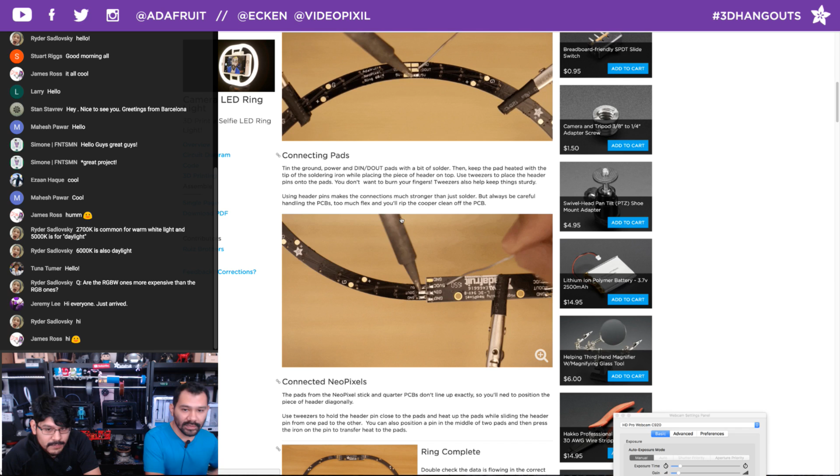So there's a big warning sign with this: when you're using this, do not apply too much pressure or bend them a lot, because you can literally rip off the copper pads. You don't want to do that, so watch out for it. It's going to add strength, but still be careful with them - they're a little fragile, not that fragile, but you know.

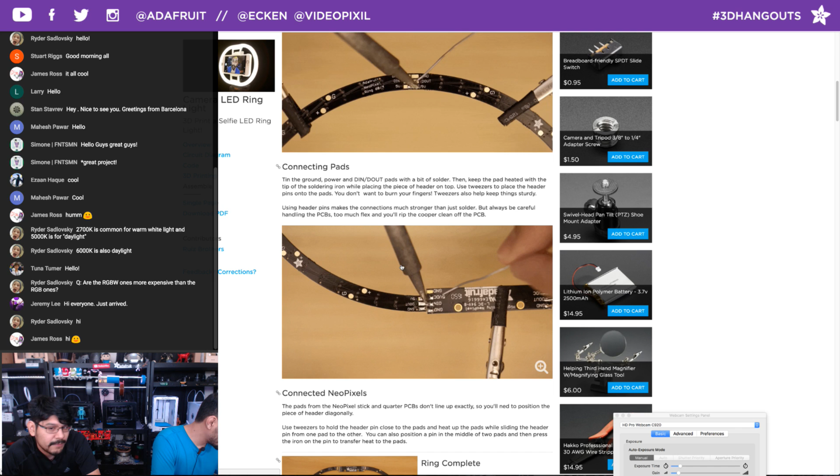Another tip I have is that the best way to solder these together and keep them very steady is to have 2 third helping hands, because 4 hands are always better than 3. What we did here was use 1 hand to hold the quarter assembly, and the other hand to hold the next PCB. That's really helpful a lot - if you don't have 2 helping hands, it's always good to have another one.

Because then you can have one held up while you're tinning wires on another one. You don't want to use just one because they're going to flop over due to the size of them, so it's always handy to have 2. And the flexible arm ones, even though they're cool and have a lot of arms, you really need something that's easy to stabilize in terms of alignment. Alignment is going to be a big thing with this - if they're not equally at the same height, they won't fit into your enclosure as well. And when you're soldering the headers together, there's going to be a big gap between the solder pads.

So you definitely want to make sure that they are completely aligned, nicely leveled, and straight to connect these together. Good point.

So the other tip when you are connecting these together is to tin both sides, both pads. Use a tweezer to hold the header on top, and then heat it up right from the middle so both pads are heated up at the same time. Then let go of the tweezer and the header, and just let it cool on its own. Don't blow on it, and it'll give you a nice strong connection.

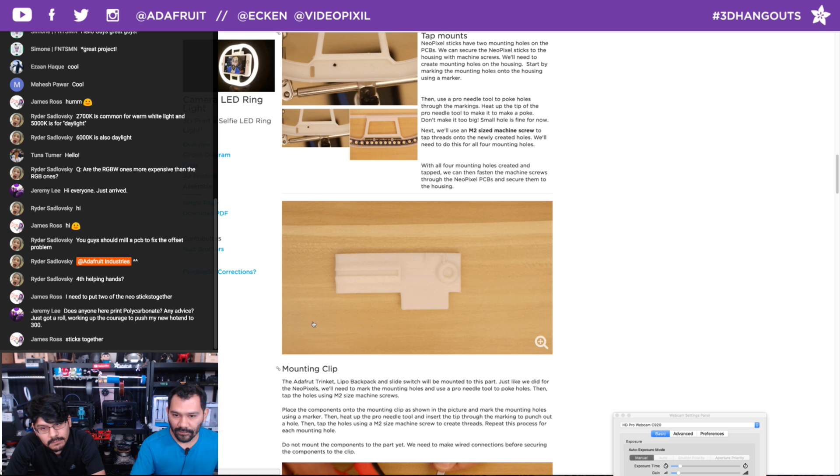Instead of having multiple mounting holes added for all the different boards, you can just go in there and poke out any of the mounts you need. Since you don't really need all 4 screws to hold the trinket, you can just poke 2 holes diagonally to hold it in place.

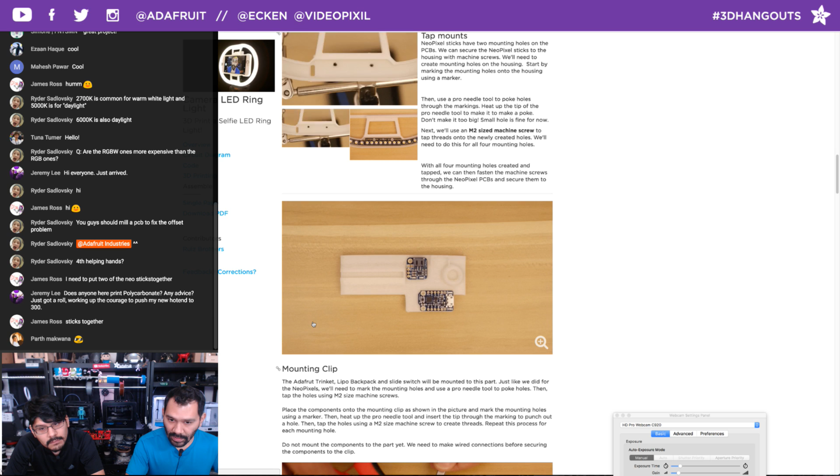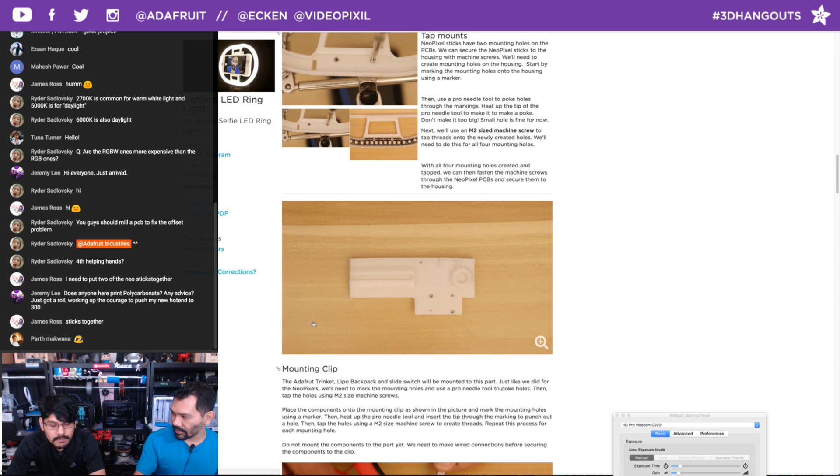So the Pro Needle tool actually came with our Lulzbot Taz, but you can pick this up at any arts and crafts store. It's primarily used as a sculpting tool to add details, and of course, poke holes through any sculptures. It's also definitely handy for unclogging extruders and nozzles. So it's a nice little tool to have in your belt.

And this was also the same method you used for mounting, or rather securing, the NeoPixel stick PCBs to the housing, since they have 2 mounting holes. Yeah, something we didn't have before with the 60 NeoPixel ring, there were no mounting holes on that, but the sticks do have 2. So it's pretty secure, it won't pop out because it's held in place nicely. That's a nice little tip there.

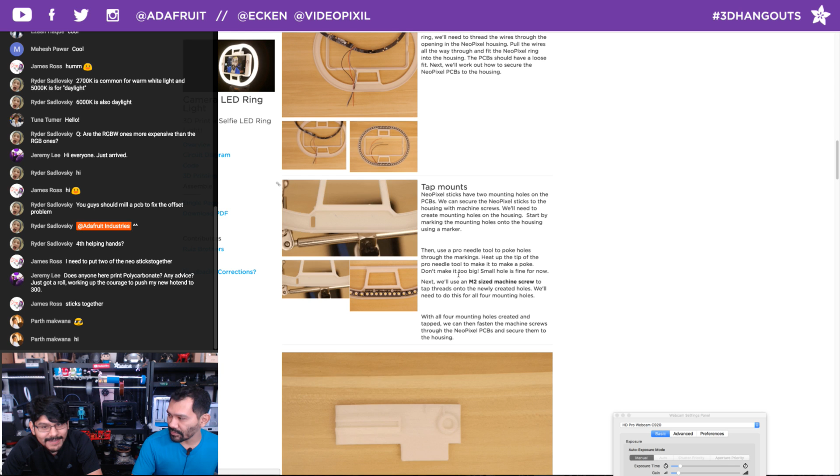One thing I forgot to mention, why I really like the Pro Needle tool, is that it's the exact diameter needed for an M2 screw. Yeah, because it'd be a little difficult if you made the hole too big. You could always make the hole bigger, but you can't make it smaller. Yeah, just print it out again.

All right, cool. So Flex PCBs are a great thing to have. If you don't have a Flex PCB yet, definitely use them. We're using them primarily to add more power and ground pins to a microcontroller. The trinket only has 1 or 2, 1 ground, and you need several grounds here, so using a piece of Flex PCB is really handy.

Yeah, the thing I had to do before we figured out how to do this is I was painstakingly making these Y cables, where I would create 1 cable and then have 2 that would connect to it to split out any of those connections. That was a big pain in the butt, because you needed all these extra helping hands to hold everything together.

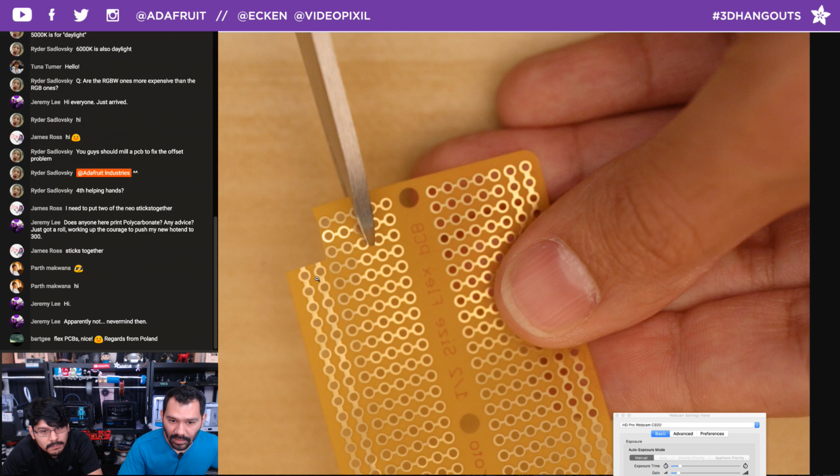This is simply about cutting off how many power rails or connections you need. One thing to point out, which I didn't notice until you mentioned it later, was the rails on the side have actually a bigger trace on them for power and ground. So I'd probably recommend using those instead of the little ones that I cut off there. Yeah, you can see that, they're a lot thicker. So use those. A little piece will go a long way.

And you can use scissors to cut them. I've used Perma Protos before, which are FR4 boards, I believe. Yeah, FR4, and they're a pain to cut. You really don't want to breathe the dust in, you need a Dremel tool. This is really easy to do, and it's thin and a little fragile. You can apply solder, tin them to make the strength a bit bigger. So be careful with them. It does flex, but you shouldn't be flexing them all the time.

And a tip for actually holding these while you solder: have a sacrificial little pin there to throw away after you solder it. So I would make, see how you need 3 connections here? I would have 4, and one of them would be a sacrificial pin, because this little helping hand would kind of bite it and mess it up a little bit.

So the tip here is to use a tweezer to hold on to the cut piece, and then attach it to a third helping hand. Not pictured here, the other helping hand is actually holding the end of that tweezer to stabilize it, because otherwise it's going to flip over with only one hand holding the tweezer. The tweezers have a really fine tip, so you can solder all the pins without covering a pin. That's really it. You can even solder on top of that, and when you're done it'll just pop right off. It won't ruin any of the solder that you slide across it.

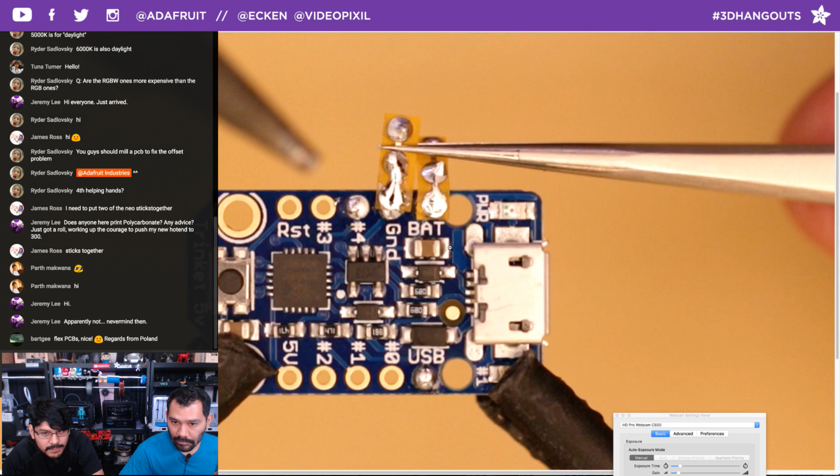Did you guys know that you can make photos bigger in the learning guide? You just have to click on it, and it'll take you to the original size, and you can get a bunch of different sizes that the system in the back end processes for us.

Okay, the other tip on this is cutting the trace for that. That's not really a tip, but yeah, cut them. Oh, okay, another thing in the code: because these do come from different suppliers, you want to make sure that if it doesn't work, instead of typing in RGBW, type in GRBW to get the library to recognize it.

So we have a strand test called strand test RGBW, and that's for the RGBW class NeoPixels. That one does come with... does it say? Yeah, that one says like Neo RGBW, but when I tried that out, it didn't work with ours. So the other thing is to just try GRBW. I know it's weird, it's like backwards GRB. What's up with that? But some of them need that. So if you get unexpected results, just change it accordingly, and it's really simple.

Yeah, the code's really simple, it's using the color wipe function. That's right here, and that's it, I just add an extra value to it. So it's pretty simple to add support for it. If you have an older NeoPixel library, just make sure it's up to date. You can do that via Arduino's library manager. So that's pretty simple, cool.

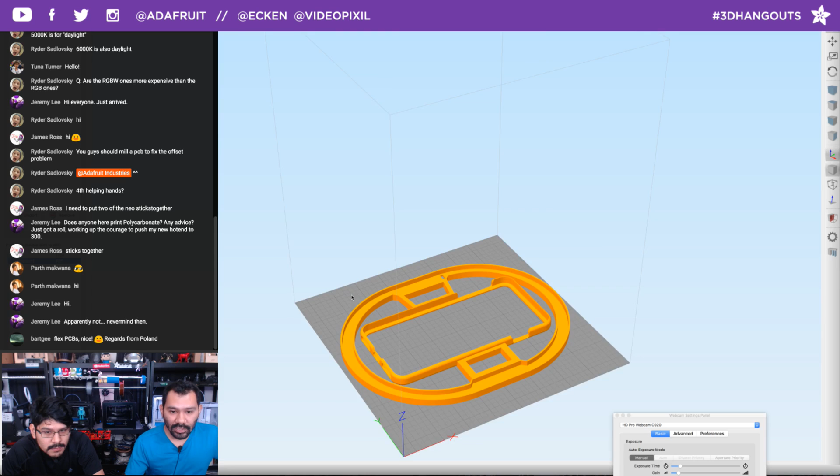Jumping over to the 3D printing part of this whole project, you are going to need a bed that is 230 by at least 220 to be able to fit the elongated shape of the big ring. This is the main housing part, it's the biggest part of the print. It doesn't fit on a Flash Forge, it doesn't fit on the Replicator 2, but it does fit on the Ultimaker 2, which is nice.

For printing out your skirt or your brim, you might have to rotate it.

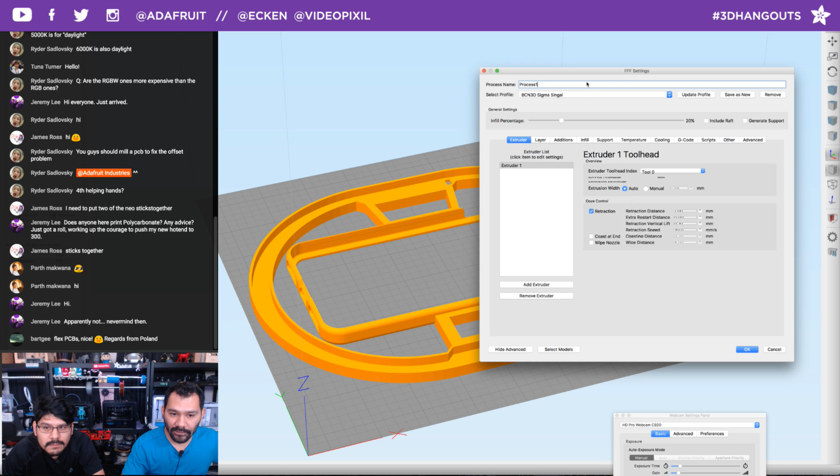If this isn't fitting, I believe I tried printing it, and it was getting up to the edges. The main reason I didn't use it, though, is because I only had 1.75 filament in the neutral white color, which offers a really nice diffusion for the LEDs.

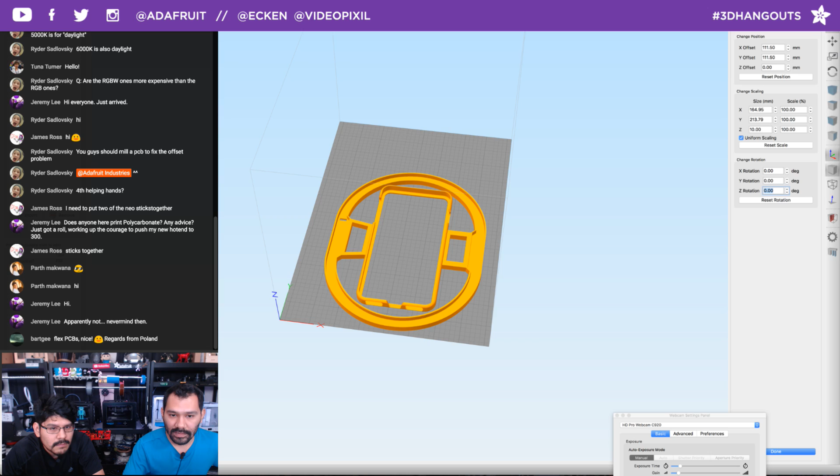And to print it reliably, I use the BCN3D Sigma. So yeah, it fits on the Sigma, obviously.

Another tip, because this is a pretty big part, to get this to print under an hour, it was about 40 minutes to print this entire thing, I used a 0.6 millimeter nozzle at 0.3 millimeter layer height. So pretty rough, but it comes out really nice. The strength on these parts is really tough because we're using a larger nozzle size.

Yeah, so I don't have any imagery for that, sorry. This is one of those cases where a larger nozzle, you're not going to lose any detail. You're actually going to increase the strength of it and dramatically lower your print time.

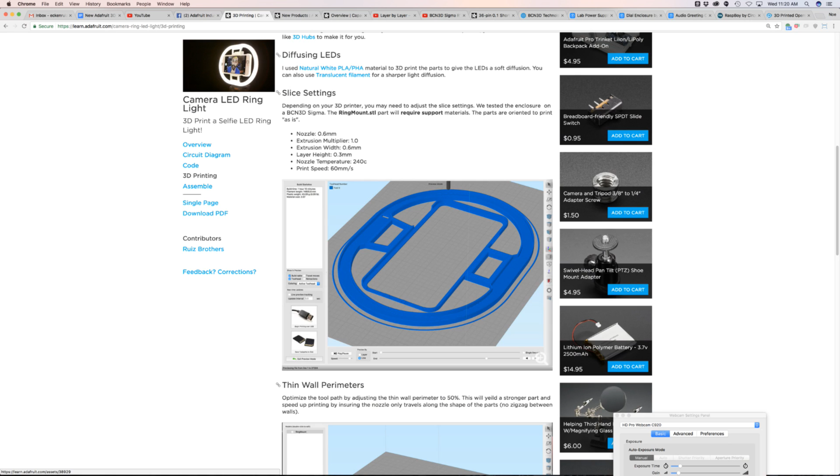So what was it before with a 0.4 nozzle? I didn't even look, but I knew it would probably be double, so at least 2 hours just to print this part. And when you're in prototyping mode, you want to get these out really fast.

So you definitely always want to use a larger nozzle if you don't have that much detail in your model. Some of the standard print settings here are just 240C and 60 millimeters a second. The reason it's printing so hot is because of the amount of filament you're pushing through the 0.6 millimeter nozzle, so you want to make sure it's nice and malleable coming out of the nozzle.

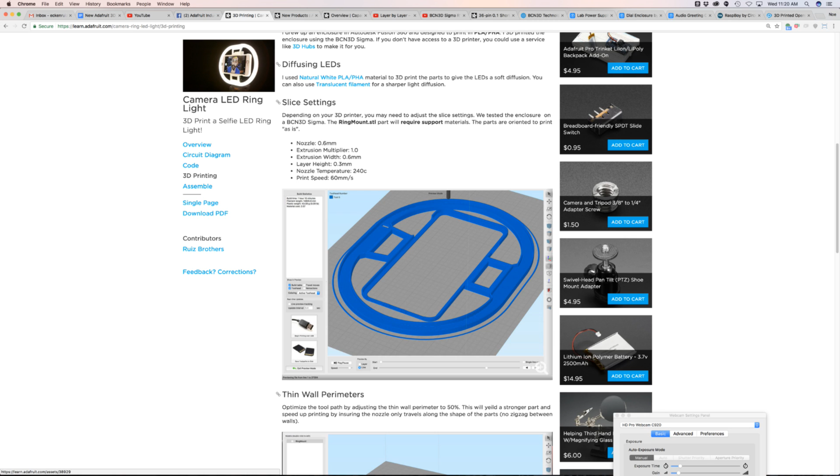Another big tip is the thin wall perimeters. You always want to visualize your toolpath before you kick off a print to make sure there's no zigzags going in between the walls. You want all the walls to be a nice straight line building out the entire outline for all your pieces. You don't want any zigzags or weird gaps left in between them. This will increase the strength of your part.

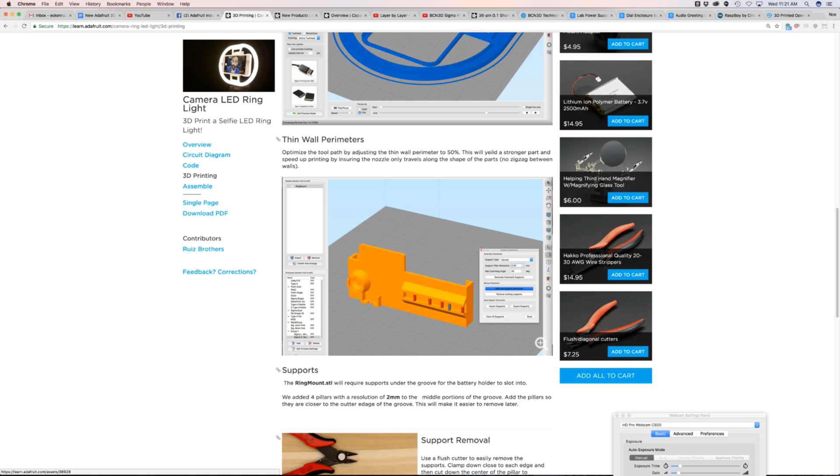For the support material, you just need a couple little pillars for the slot part on the ring mount where the battery slides in. The resolution size we use for that is just a 2 millimeter sized pillar, so a very tiny support, and it just goes across the outer side of the slot there.

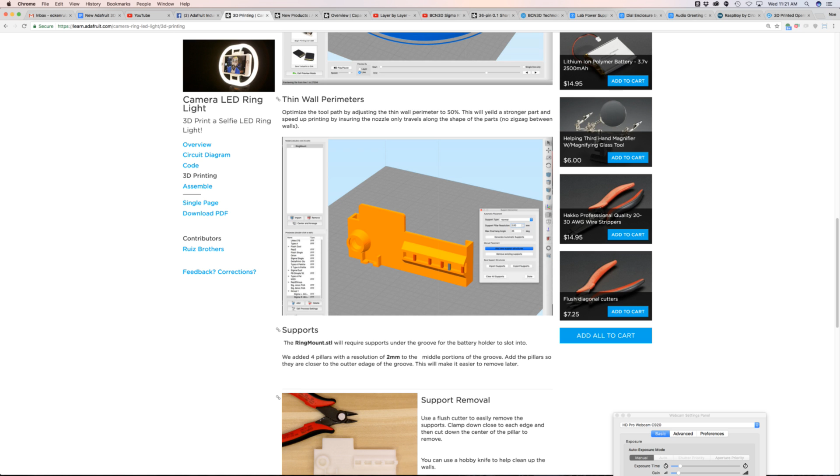You don't want to put it on the inside because it's going to be a little bit more difficult to remove. Our favorite tool for removing these supports is the flush cutters, you can see if you scroll down there. You just clip them from the top and the bottom, then clip them right in the middle, and they should pop right off.

If you have any leftover parts of the support material, you can use a hobby knife to cut those off. You want it to be pretty smooth to easily slide the battery holder inside of that. And I think that's pretty much it.

Cool. The type of material you're using again is the neutral white PLA PHA, actually, which is what we had in stock for this, but we do have a regular PLA version of this.

Switch over to the overhead. Cool, I'm going to fix something while you do that, okay?

Yeah, so this, you don't really need it, but it does add a nice little diffusion to that. And the cover pops right off like that. It does actually offer some stability to the outer rings right here, because again, these are not held in place by any of the mounts like these sticks are.

So you do want to have something to protect these, but they're not going to fall out on you.

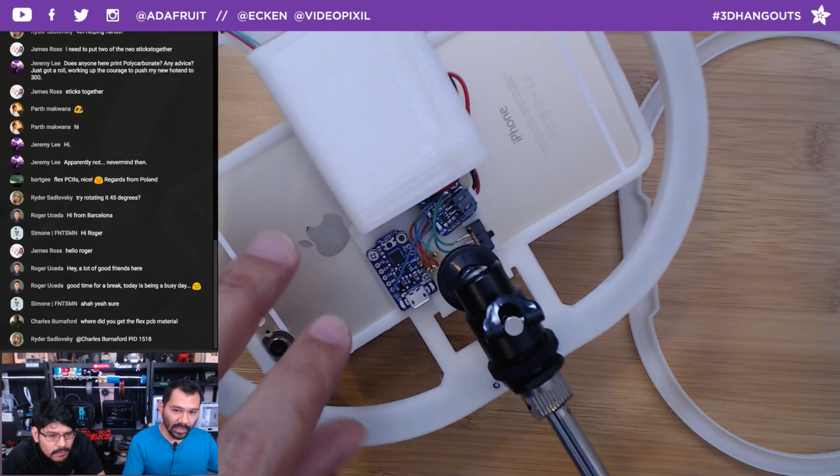For the back, you can have all of the parts exposed, or you can make a little separate part to enclose it. For charging, hook up your micro or mini USB, depending on which Trinket you decide to use. Another tip is wire management - make sure all your wires are nicely bundled and sized properly so you can neatly hide them in the back.

Like we were saying before, you can modify the Fusion 360 files if you want to use a different phone, or if you don't even need the phone at all. It works perfectly as just a single ring light.

You can also change the startup in the Arduino code if you don't want the little marquee going around - if you just want it to instantly turn on. It makes a very awesome light, as you can see there.

We used it already for all the part shots - I already had one built and kept using it. Especially with the micro or macro shots where you're close and get a shadow because of how close you are, it does a really nice job of diffusing light onto your small parts.

You also get that really awesome ring effect on your eyes when using the front-facing camera for doing a Facebook Live or something like that. Definitely handy - I wish we had these a couple years ago when we needed lights. If you're looking to make a cool light for DIY projects, it's the way to go, definitely cheaper than pro studio lighting equipment. All the parts come to about $80, which is cheaper than any pro lighting solutions.

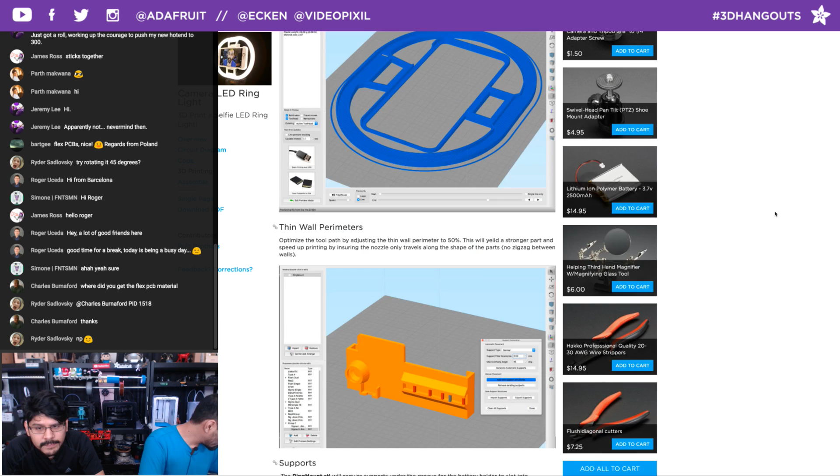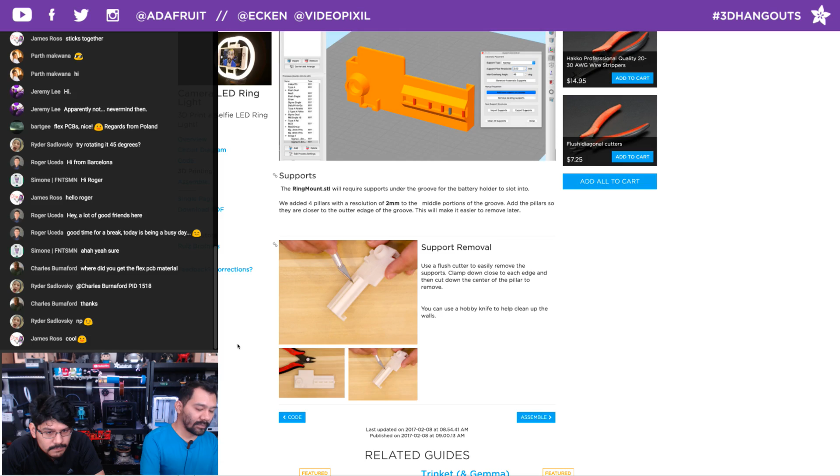We have all of the camera parts that we always like using, like the mini swivel head and the 3/8 to quarter adapter that you can add onto here. I got those - it'll work with a bunch of the different camera projects we always work on.

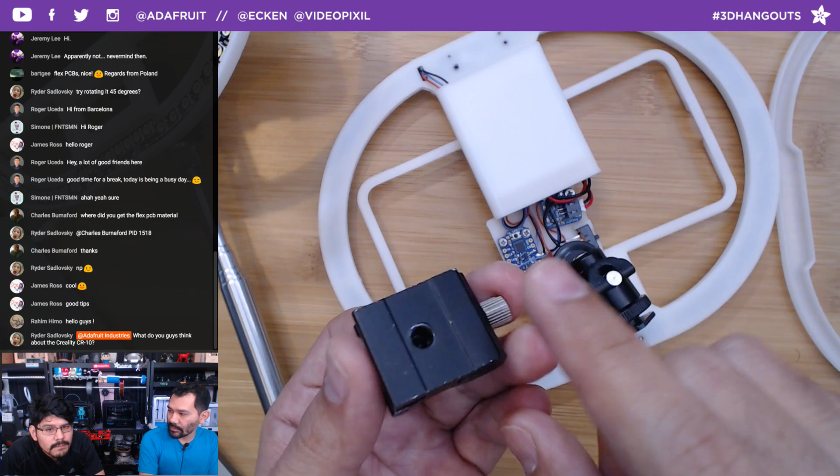One thing to note: if you're going to mount this onto a tripod, you'll need a little bit of buffer to make sure these are aligned. So you also have these hot shoe adapters that'll slide in right there to give it the extra height you'll require when attaching this to a tripod. The hot shoe adapter slides in, and then you have a 1/4-20 on the bottom to attach that to a quick release plate. So just a little tip - that's how you attach it if using this on a C-stand or tripod.

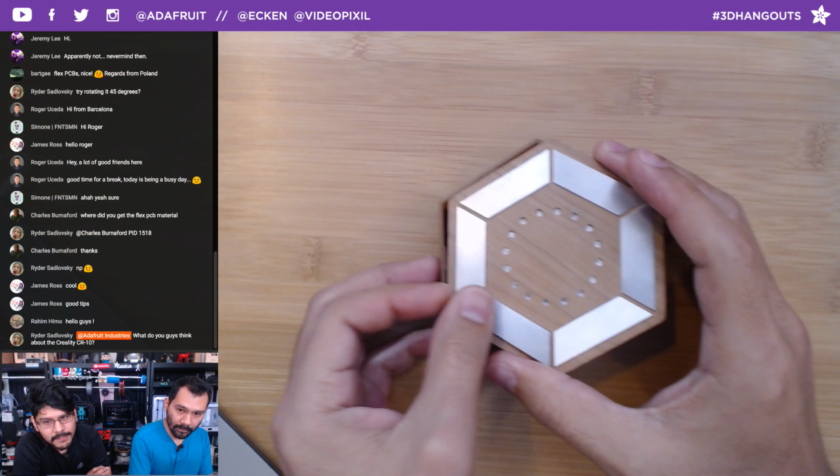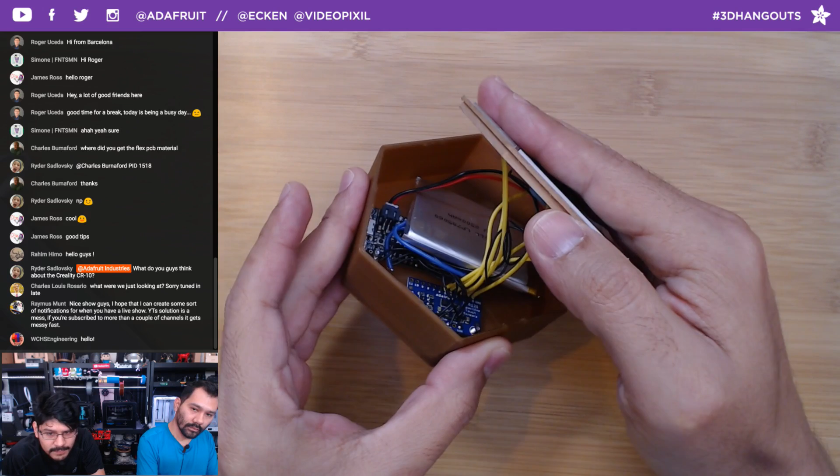Yeah, so next week's project is this guy. About a year ago I started a MIDI project, a MIDI controller. So this will be next week's project - it's using an Adafruit Feather 32u4 Bluefruit LE. It's kind of like a remix project of Todd Treece's project that he did, I think last year. It's using a capacitive touch sensor, the MPR121, and a couple of NeoPixels.

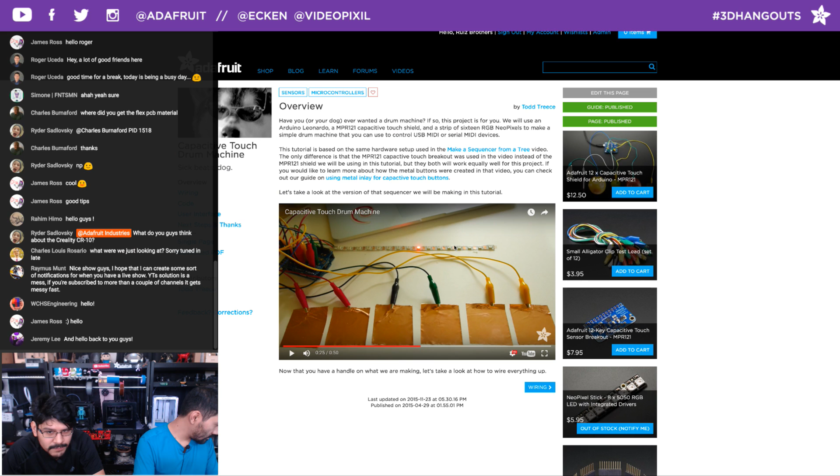So it's kind of like a step sequencer with a couple different modes. Todd did awesome work on the interface for it - there are different modes you can trigger. You can have more steps, change the tempo, have shuffle changes, different MIDI channels, change the pitch, all through just a combination of buttons.

I was collaborating on a good enclosure for this project because it's a great foundation, but we wanted to wrap it in a little enclosure. So I got a little crafty and came up with this thing. It's like a hexagon shape with 6 sides and 6 different touchpads. These are machined out of aluminum on the Othermill Pro, and the cover is machined out of cherry wood.

The aluminum pads are attached to wires with copper tape. Here's the inside of it - it's a really simple circuit, just 2 boards and a battery. We don't need a charging circuit because the Feathers all have built-in charging, so it's awesome. There's a really big 2500 milliamp battery, and a slide switch, of course, to turn it off and on.

This is from about a year ago. I'm reworking it a little bit because I found the pads are a little too close to each other, so sometimes my finger slips and presses two at the same time. So I'm offsetting it a little and adding some different mounting fixtures. That's basically it for next week's project. I think that's really it from there. I'll pull out some tips and things I learned from it next week, but for now it's just finalizing it and fitting it inside the enclosure.

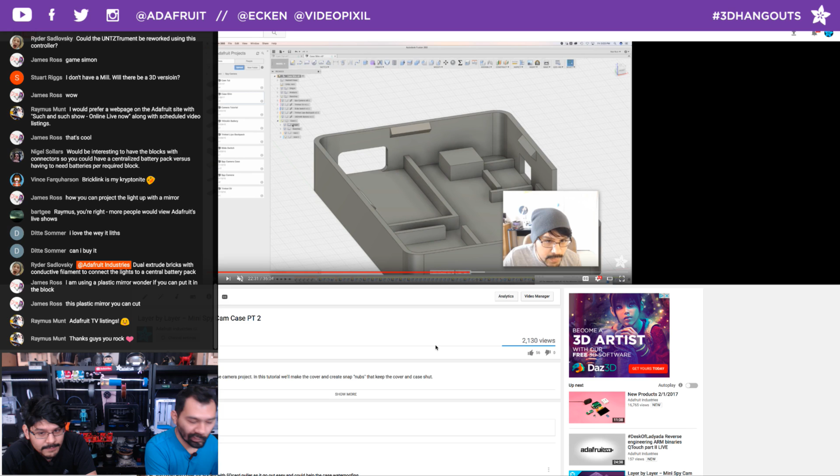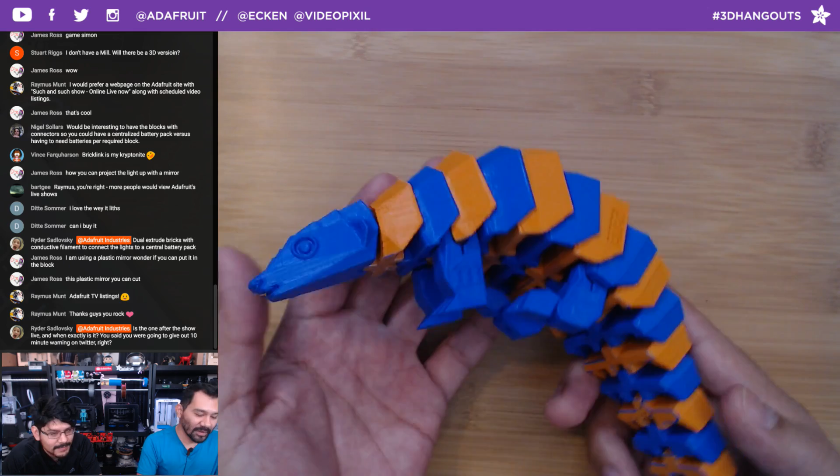Shop talk. So this week's Time-Lapse Tuesday is with this, how do you pronounce it, Pangolin? I like how you said Patagonian. This is Pangolin, it's dual extruded.

Everybody's been printing out this super cute design, and I decided to go ahead and make it a dual print. It's super easy to do inside of Simplify 3D - you just go to the mesh menu and select separate connected meshes, and it'll give you each section, which you can then assign to an extruder.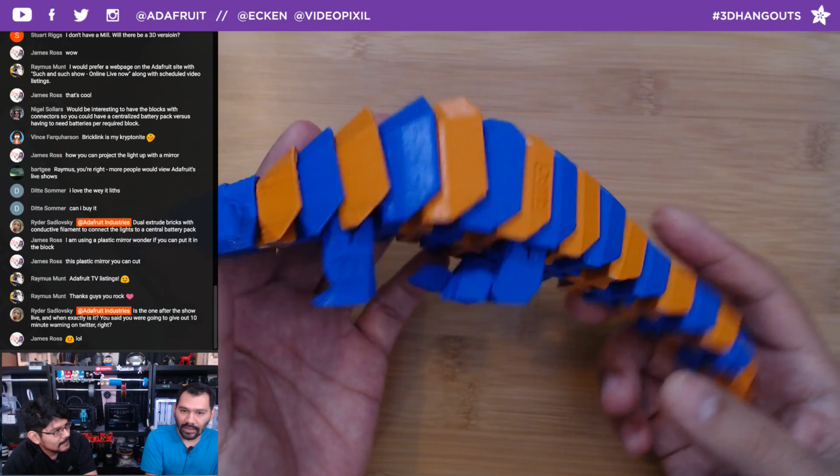If you want a full tutorial on how we did it, we did a live layer by layer on this about two weeks ago when I did the snake, which covered that same process, so we'll link to it as well.

We're using the 0.6 millimeter nozzle again, my favorite nozzle because of how fast you're able to crank prints out with it, dual extruded, both 0.6 millimeters. The cool thing here is we're using 1.75 millimeter diameter filament for this.

Just regular PLA - I did try PLA PHA but that needs adjusted settings, so I used the profile generator on BCN's website to crank this out. No prime tower, just purging on the sides as usual, and it took 7 hours instead of the 10 plus hours other people are reporting. Another time-saving thing is I'm using a 0.3 millimeter layer height, not super fine, but it gets the job done in terms of keeping all the hinges from fusing together, and it turned out really well.

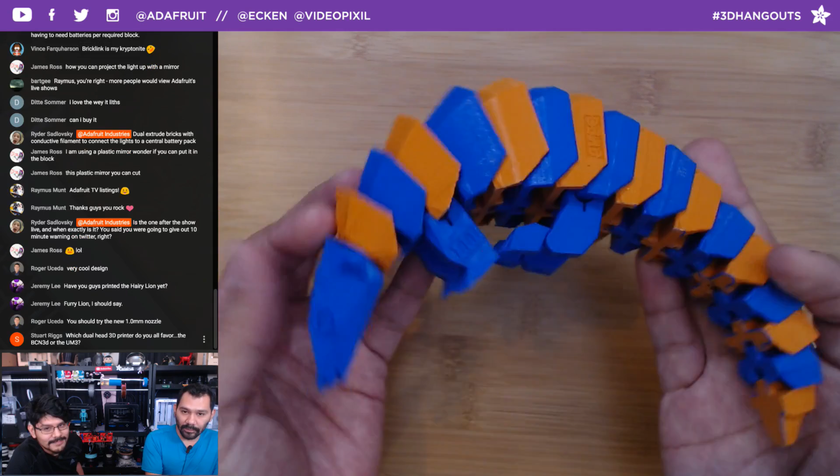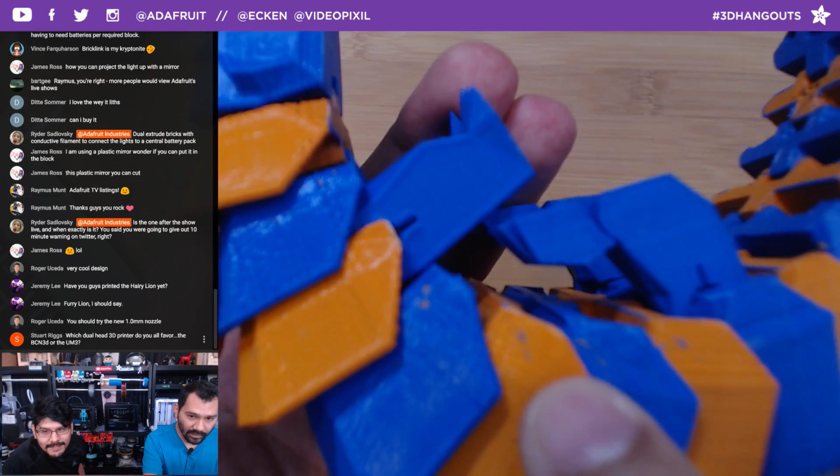Any contamination or anything? There is some, not drastic, just tiny little drops here and there, which isn't bad at all - you wouldn't see them if you didn't point them out, and that's only on that one side.

The hinges did fuse a bit, that was the only issue. The horizontal compensation default for that is negative 0.1, I believe, since it's going inward. But overall this turned out really good.

I was going to print this on the Ultimaker 3, but it just didn't fit. I tried putting it on there diagonally, but because of the dual head design they have, you get a lower shrinkage of the build volume when you do that. I was also scared to scale this down because of the hinge parts—I was concerned it might not resolve well and could fuse together. So this fit perfectly on the Sigma instead.

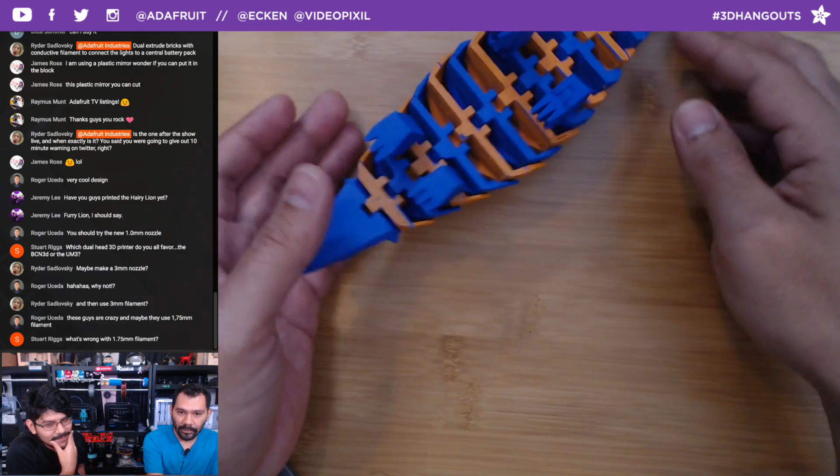Do you think this is the first pangolin model that's been dual extruded with different colors? I haven't seen anyone else try that. I don't know, maybe not.

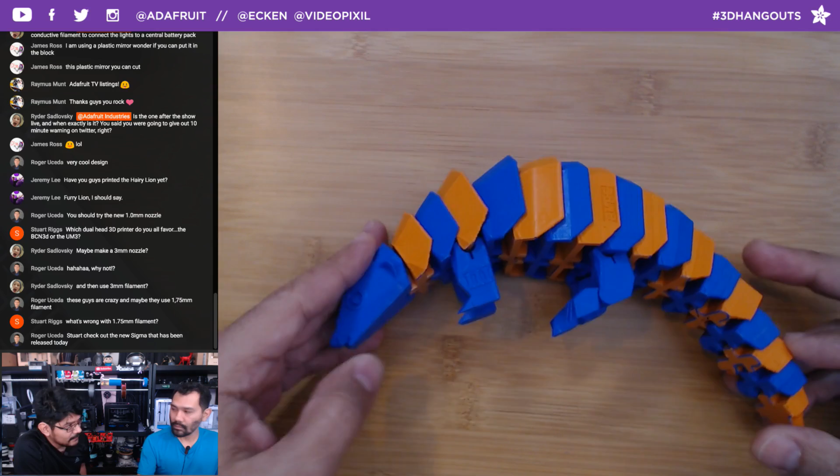So again guys, this was printed with 1.75 millimeter filament on the Sigma BCN3D printer, which is something you can do. There's a little hack to enable 1.75 diameter filament to print properly on a Sigma—it's literally just one screw you remove so the spring arm can fully grasp onto the filament.

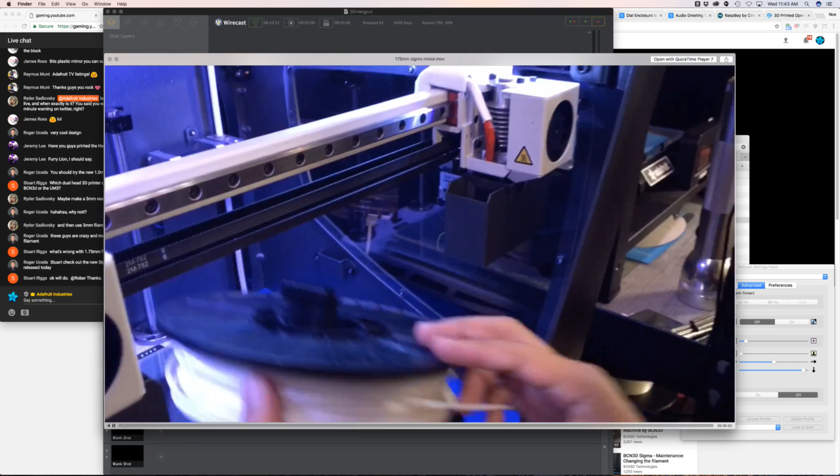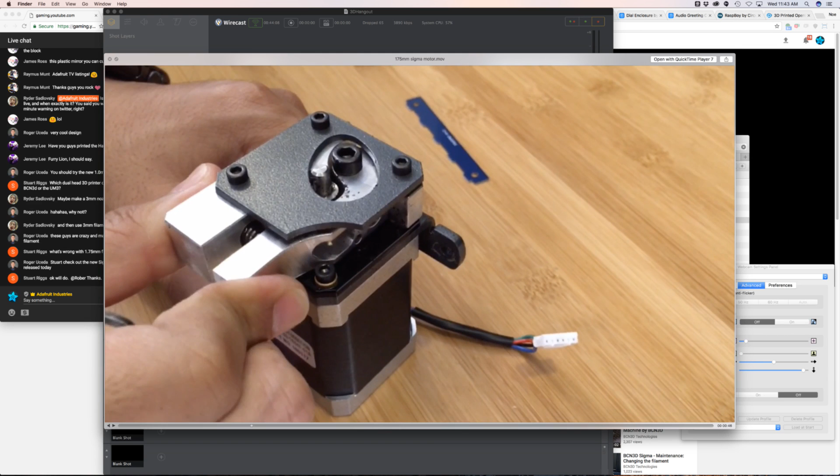So this is the whole process: take the filament out, you have to take this piece off. Here's where the steppers are—you remove that and it gives you access to disconnect the motor. You take off that whole assembly, and that screw right there is actually the culprit causing the issue. It acts like an end stopper on the spring arm, stopping the handle from fully grasping onto the filament.

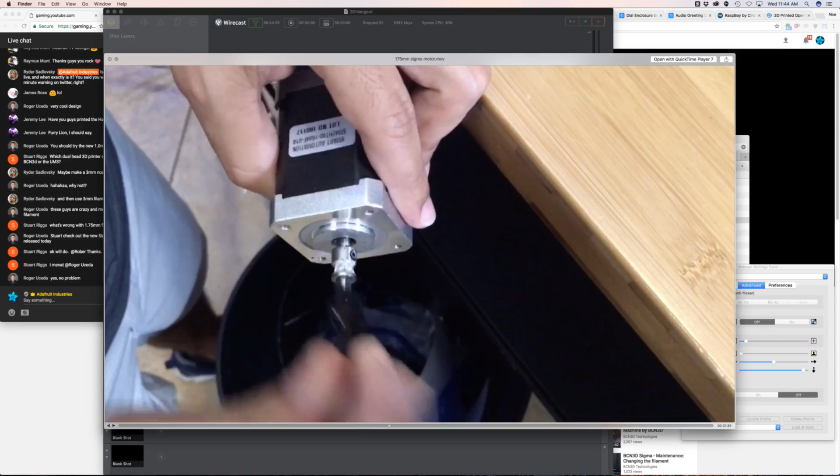So you take apart the assembly to access that screw, and that's the main thing you need to get rid of. Once you remove it, the spring arm will be able to fully apply pressure to the bearing so it can hold onto the filament.

And clean it while you're in there—why not, if it's that dirty. You want to clean this once in a while too. That's pretty much it—put it back together. If you can see right there, it's literally half of that length that the spring arm needed to actually hold onto the 1.75 millimeter filament.

For the tightening adjustment, it's exactly the same—just two turns, and it's able to hold both 2.85 and 1.75 millimeter filament. That's pretty much all you have to do. You can see where the gear is going up to. Then you just put it all back together and it works perfectly.

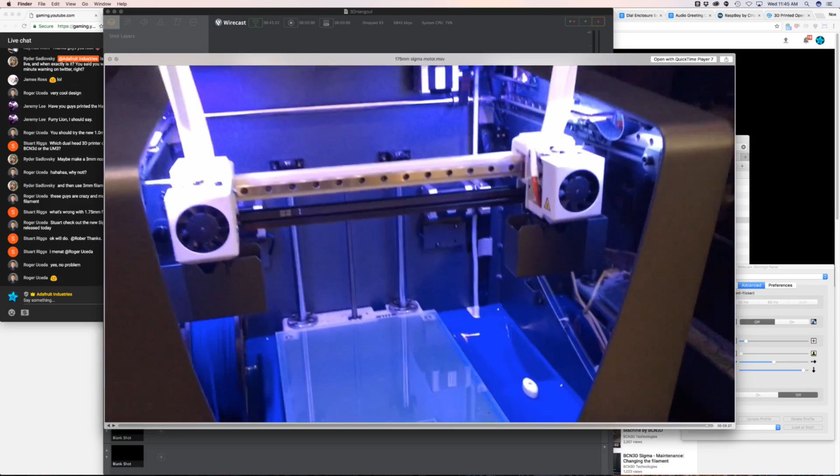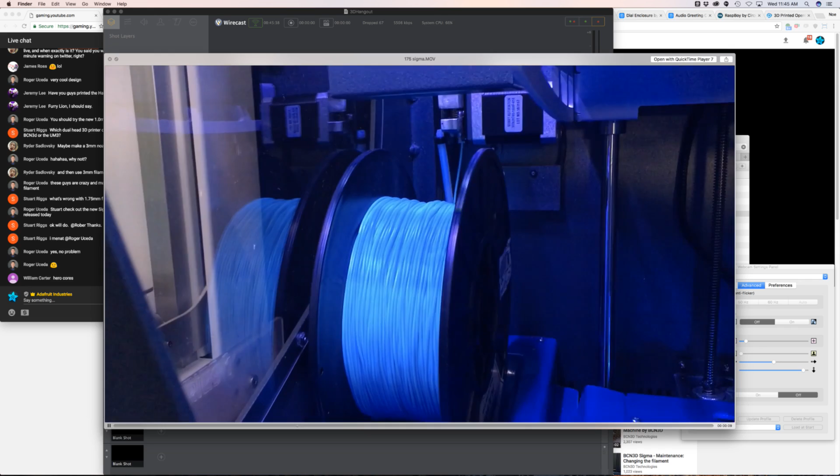The only thing I had to change was the diameter size inside Simplify3D, and that worked perfectly. Here we are printing—this is PLA PHA too, which is kind of difficult to print with because it has a bit of warping. With dual printing I haven't figured out the settings yet, but single print PLA PHA works beautifully on this with both the 0.4 millimeter nozzle and the 0.6 millimeter.

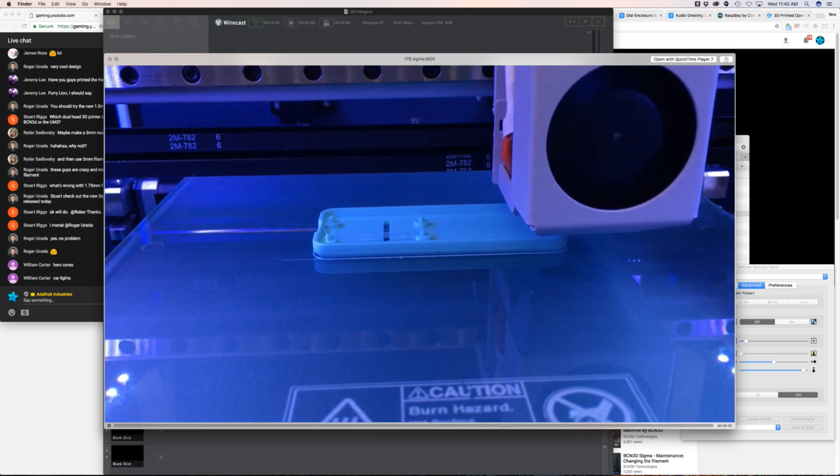You've put in hundreds of hours now with 1.75 filament, so that's pretty awesome, and again a testament to this setup.

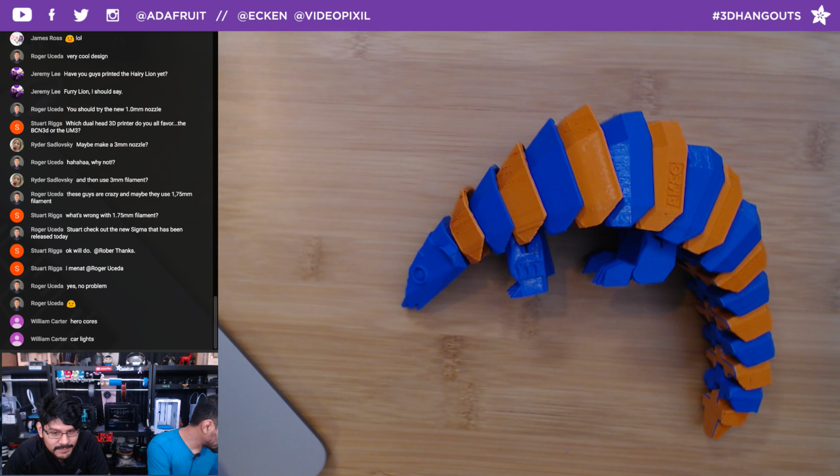And this is a perfect time to segue into the new Sigma R17 release as well. Early this morning, the fine folks at BCN3D Technologies released a new version, the R17 version of the Sigma. So here it is—if you haven't checked it out already, go check out the video.

Awesome new features. My favorite feature is probably the quiet fans, the smart fan upgrade. We probably shouldn't play the whole video or we'll get a flag, so check that out on their website. Really nice upgrades.

My favorite, of course, is all the nozzles that they now have. You can go big from 0.3 all the way up to 1.0, so you're able to get crazy print details, massive amounts of detail now. Your Lego will be super detailed. With the 0.3, I'm definitely going to test it out, although the 0.4 works just fine.

And they're also offering it as an upgrade as well, about $250 US dollars for the whole nozzle kit plus the fan upgrade, which I definitely want. I think only the Ultimakers are able to sort of figure out with the thermistor that, hey, the nozzle's not on, turn off the fan. So I'm guessing that's what this does as well.

Some folks are asking what makes it a strong nozzle, a robust nozzle, a non-abrasive nozzle. That's the stainless 0.5 millimeter nozzle - they're going to have stainless steel, so you can use all of your bronze, copper, all your abrasive filaments, and I can run those through on there.

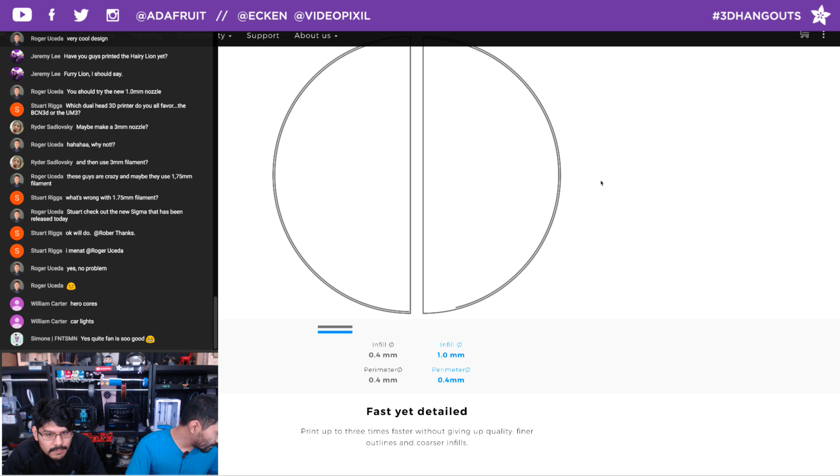They have animations and stuff showing right there, using different nozzles, one for infill and one for the outer shell. Yeah, it's awesome. It's such a smart, clever thing to do.

Makes it stronger and faster. It's like you get double. And if you guys have an update, if you have the quote-unquote older Sigma, you can always check out the updated firmware. I think they just literally pushed one out on their GitHub page, check that out.

There should be some little bug fixes on the screen navigation through the menu. So check that out. Once we get our hands on them, we'll let you guys know - I think by next month or something like that, we'll be testing that out.

Can't wait, looking forward to it. The request to have a second one is because when I was printing these, I needed to print both sides of the Lego pieces, and I just wanted to use the Sigma for all of the pieces so I don't have any mismatch in the tolerances. So it will definitely help out.

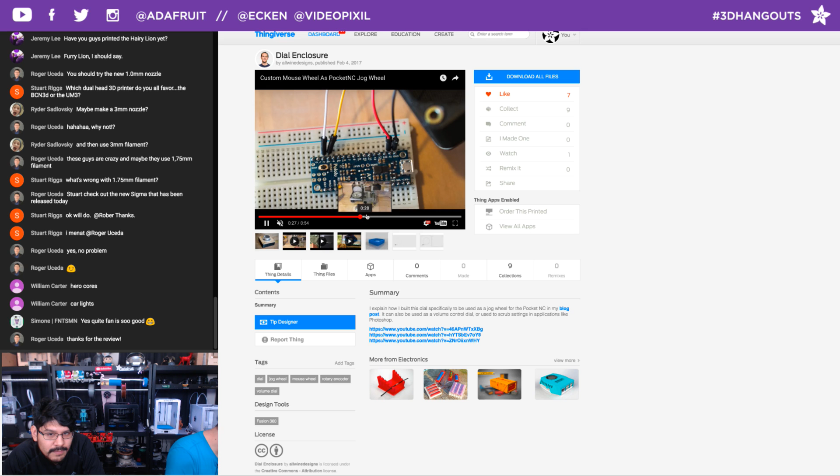Second one is this really nice dial. I really like this dial. It looks like it's a combination of laser cutting and 3D printing and just kind of repurposing this fancy knob. Thingiverse user All Wine Designs came up with this project, and he's using it to do several different things, like jogging a wheel. Oh, he made it in Fusion, that's cool. This is kind of the detail. I'm not sure what the microcontroller is, maybe it's an Arduino compatible. Yeah, Arduino, I think that's a Micro or something, or Pololu. Cool, so he's using it to control his CNC machine.

Looks pretty cool. You can also use it for software stuff, so volume control and maybe color picking inside of Photoshop or whatever. It's pretty neat, I like buttons and knobs.

I'm a simple guy. Here's another button, this one's from Kyle Moore. This was kind of a hack, sort of a repurposing project. He took the audio module from one of those greeting cards that has an audio module in it, and made it into a nice little enclosure with a nice pushy button and a little speaker too. Very, very simple, but still pretty neat. I prefer this one than the paper card.

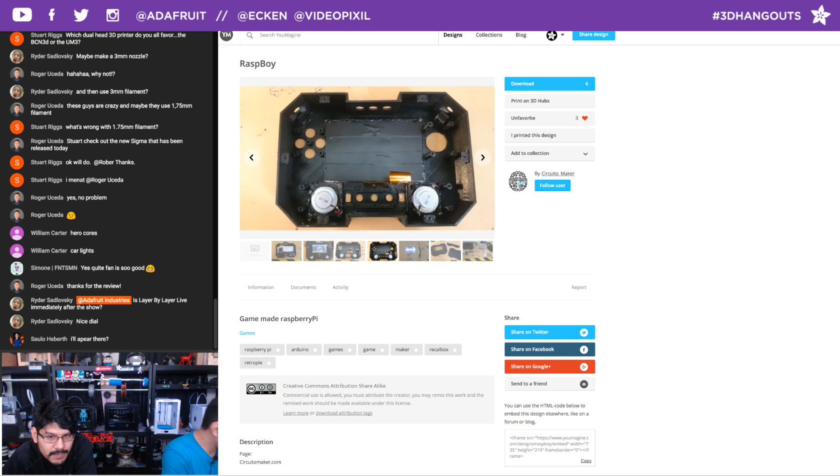I kind of found this one in the morning actually. This is a Raspberry Pi project using, I think, a Raspberry Pi 3, RetroPie of course, and kind of a Game Gear, I believe. So pretty neat, pretty big project. On YouMagine. And I think that's running, that looks like PS1, not sure, but yeah, it's got all the things you would see on a nice handheld.

So it's really cool. The last one I want to talk about was from Daniel Norée. He came out with some updates to his OpenRC F1, so this is the 2017 updates. Check that out, I have yet to build one but I'm looking to build one, it'd be really fun. Also, Daniel has a great YouTube channel too, so check out his channel, I'll have it linked below. He's coming out with some great reviews and content and things, so shout out to Daniel Norée.

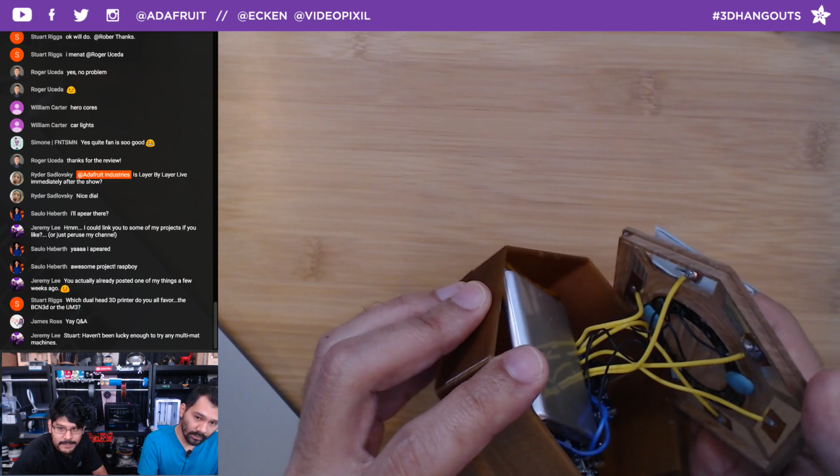I soldered a wire to the copper tape, and the sticky backing sticks onto whatever surface is conductive. It's actually exactly what I'm doing to make the light brick work. Yeah, you soldered to the copper tape. Yep, great, it's like how I'm doing that.

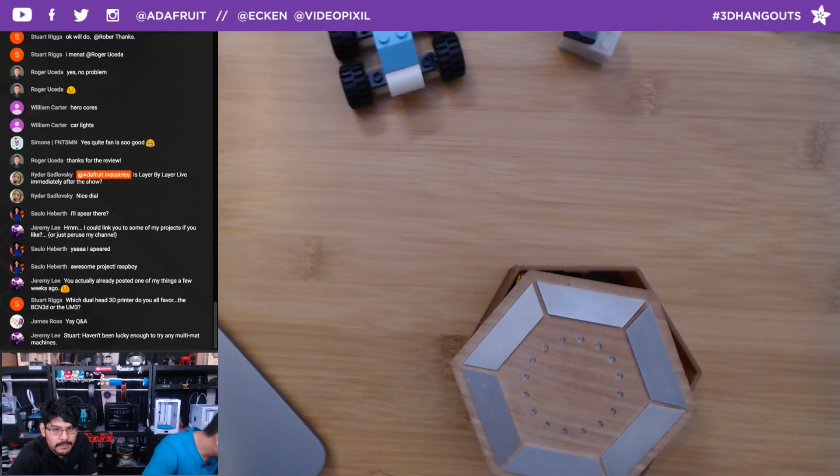Good question from Jeremy Lee: does anybody here print with polycarbonate? Any advice? Just got a roll, working up the courage to push my new hot end at 300 degrees. I have not, but we do have polycarbonate. I just don't really have a use for needing that strength, but definitely check around YouTube for tips. I've seen that it is kind of tricky to print with. I think you might need an enclosure. I believe Tom might have a good tutorial on that.

Ryder was mentioning for the LED ring, to connect the offset on the sticks to the ring, we could mill out a PCB to fix the problem. The only thing was that I didn't want to increase the size of that anymore. Yeah, you're pretty much right up against it like that. Okay, but that is an option, you could do that, like a right angle to make custom PCBs would be cool. Well, the pogo connectors - I've seen somebody do that, which is really cool.

Stuart is asking which 3D printer for dual extrusion is your favorite, the BCN3D or the Ultimaker 3? Tough question - Pedro, you can answer this since you have more experience with it than I do. I want to say BCN so far, because of the way you're able to use Simplify3D, you can control your tool paths. As it stands right now for the Ultimaker, you can't use the Wi-Fi setting with anything other than Cura, and I don't know all of the settings to manipulate the tool path so it's not doing any gaps between the walls or anything like that. You have to design for Cura instead of making your slicer work for your design. Exactly, that's what you're able to do with the BCN at the moment.